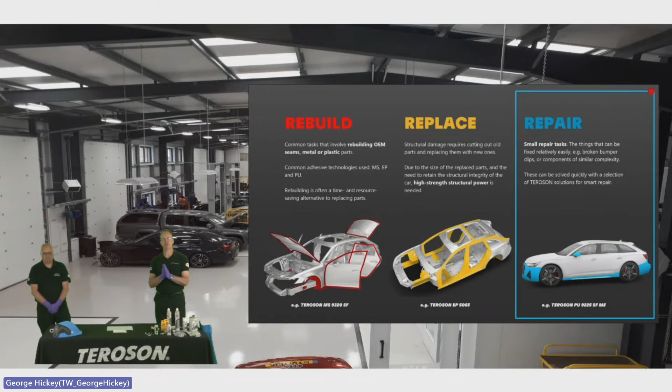And again, this room, this is a big change from last time. And again, it's work in progress. I don't know about you, Barry, but there's cameras everywhere. I can count about 6 cameras. There's lights. Like being in the studio. We've had hair and makeup this morning. I think we're all ready to go. Yeah. Little tip, Baz, there's a couple of TV presenters just about to part company. If we get this right, it could be our next gig. Yeah. Hold tight. So let's start.

This first slide represents where we are currently. We're going to be at the Automechanika in June, and we have a car shell that we had last year, but we've done some more effects with it this time round. A colleague of ours, Lee Goff, has actually painted the vehicle to represent these 3 colour stages: red, rebuild; yellow, replace; and blue, today's subject, is repair.

Yeah. Now, back in October, November, when Lee and I did the sprayable seam sealer, that came into the rebuild section with the modified silanes chemistry. And that proved to be successful. We got a hell of a lot of sales leads from that, which was great. And that's been a very good way forward. Hence, we're doing this one today.

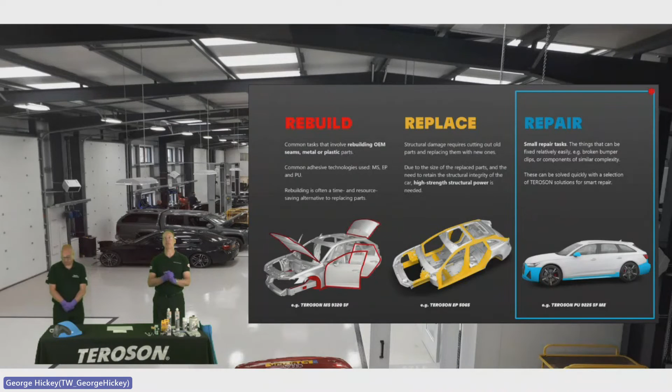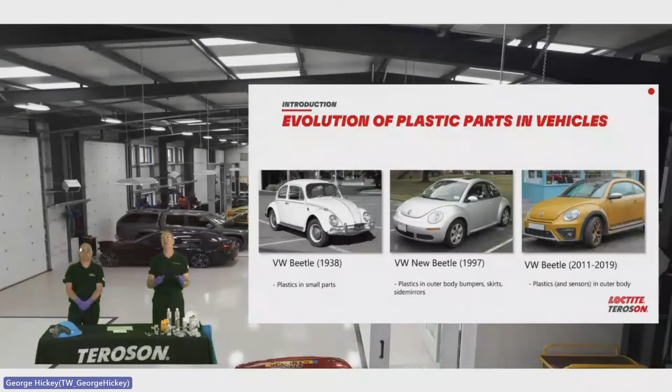And from a car manufacturing point of view, car manufacturers are obviously looking at reducing the weight of the vehicle the best they can, so that it's going to be a lot more economical to run, a lot cheaper to manufacture, and a lot better for the environment. Ideally, that's where we're heading. So that's the big changes in progress there. And this is where Henkel as a manufacturer plays a massive part in actually putting these cars back together after repair.

So again, these are a couple of photos I've taken on my travels. I'm not going to tell you where, but I think that generally represents most crash repair centres we visit. They've generally got a skip through them. I'm not doing a David Attenborough, not lecturing anybody, but from an Henkel point of view, we can certainly help reduce that pile of plastics. It's wasted opportunities. There's a lot of plastics there.

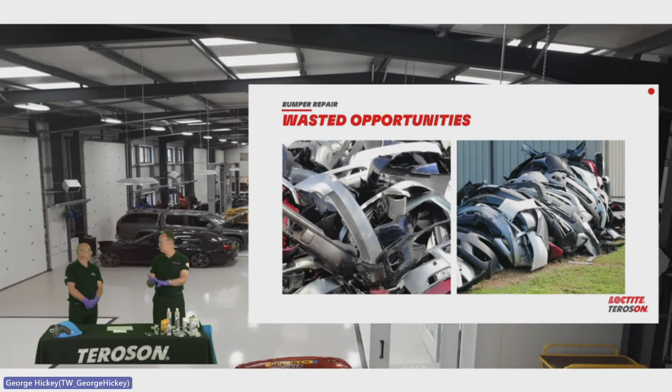I hope on this webinar today we've got a lot of estimators in the audience, because this is key. It's an estimator's dream. If we can get a lot of these bumpers repaired rather than replaced, it's bringing labour and opportunity back to the body shop.

So practical examples of where these repairs are on a particular vehicle. You see the car there, colour coded with the blue, showing exteriors and interiors. Exteriors: typical bumpers, spoilers, bonnets, tailgates, boot lids, roofs, doors, side panels, etc. Interiors: lugs and clips on coverings, on pillars, for example.

How many times do we go into a body shop and they're stripping carpets out of these things all the time, roof linings, and a panel beater painter might just break a clip off and they've got to replace that. Yes, they can order a part, but how hard is it to get these days. So it's a lot easier if there's a system in place to just repair rather than replace.

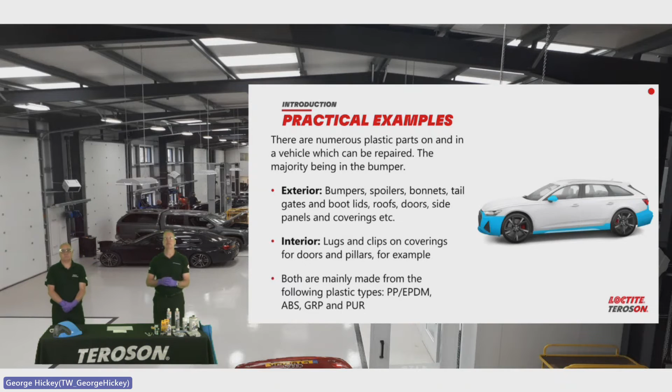Most of these plastics that we come across in manufactured cars are typical plastic types: PP, EPDM, ABS, GRP, and PUR polyurethanes. That's generally where we're at.

So why repair? My question back to you is, why not? You don't have to replace things if you can repair them. As you can see on the slide, it can in some instances be cheaper to repair a bumper than order a new one. It's more sustainable, better for the environment, and reduces your pile of bumpers outside the back of your body shop.

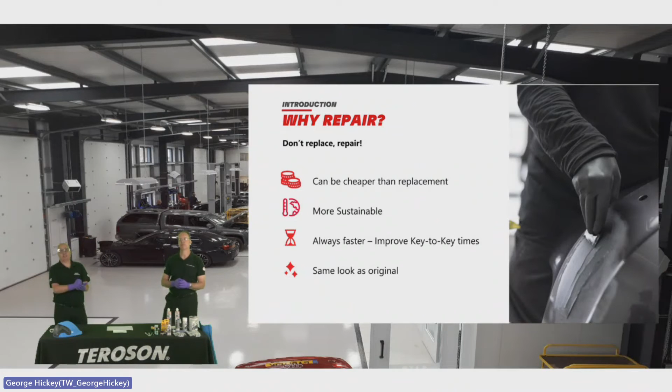It's definitely always faster, especially as we've already said - trying to get parts today is the biggest headache for a lot of body shops. How many parts managers are just banging their heads against the wall waiting for parts to arrive? If you can repair something, it's faster and it improves key-to-key times, meaning the car's not in your body shop as long.

Hence why courtesy cars - you mentioned the other day how many courtesy cars are out there. This reduces the time they're out there and gets them back to customers quicker. And you're using the original part, so it basically looks the same as the original.

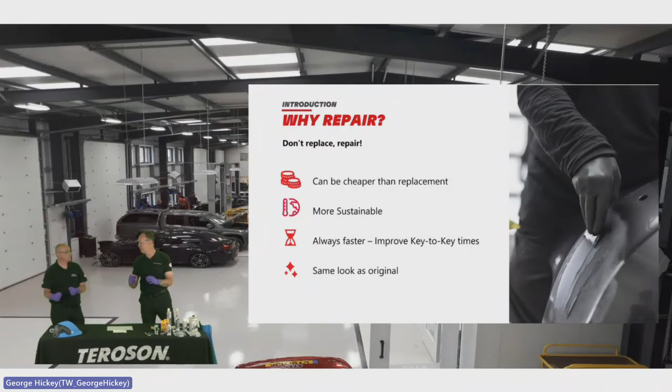Not only that, if it's not an OEM part, quite often a lot of the aftermarket parts aren't exactly a great fit. So body shops are ordering parts that don't necessarily fit like the original. Again, if we can keep the original and get a repair in place, it's a win for everyone.

So there are a couple of do's and don'ts. You can repair bumpers, lugs, spoilers, boot lids, as we said - and not just on cars, motorcycles too. You've got your fairings, your plastic fairings, everything like that. There's loads that can be repaired as well.

There are a couple of don't-do's. We don't recommend headlamp lenses and radiator grills to be repaired, and also brake fluid containers and fuel tanks are prohibited from being repaired. Pretty obvious, but it needs pointing out - it's general industry standard that you're not repairing those.

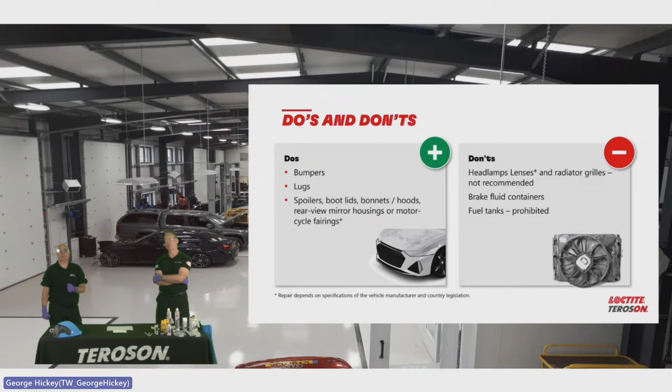So what's in the system? Our system is the Teroson PU 9225, our plastic repair adhesive system. We have a few different speed products in that range: the standard one, this 9225; the 9225 SF, which is the super fast; and the 9225 UF, which is ultra fast. We also have ME versions in the SF and the UF.

Whoa, we're complicating things now. What's ME? So where are we going now? ME is basically micro emissions, so there's less emissions from those products. It's better for the user, there's less isocyanates in products, and it's better for the environment. Safer for the environment. Yeah, so that's the adhesives.

We also have a cleaner, and we also have an adhesion promoter. And we've also got a fibre mesh, which we use to bridge gaps in the back of the bumper and reinforce it.

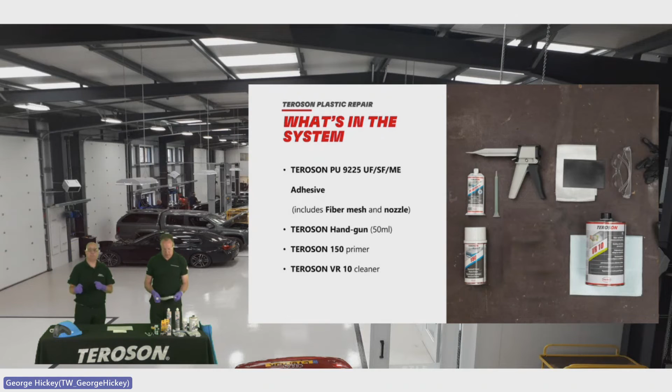Julian is showing you now. That'll be this, the mesh. Really strong, yeah. Again, what I love about this, we're not putting any metal back into the plastic. No, it's just this. No staples, no rivets, no screws. Just this.

Okay, so on the product range, we briefly mentioned them, we'll just briefly go through them. So we've got the 9225, that's our slowest of the products. That product basically gives you sort of 7 to 10 minute working time, and that will fill cracks bigger than splits in bumpers, bigger than 7 centimeters. And we're going to show some examples of different sizes and what we can repair with different products.

So then we've got the SF, which is a super fast version. Both the 9225 and the 9225 SF are available in 50ml cartridges and 250ml cartridges. The benefit of the 250ml cartridge is it just goes in a normal caulking gun. So again, it's just a two component product, like the panel adhesive.

Yeah, exactly. So your SF is for cracks and splits smaller than 7 centimeters. You've got a lot less working time, so you can sand that product within probably 10 to 15 minutes. But then, as we already mentioned, we've got the ME product again, the health and safety version.

And then we've got the UF, which is the ultra fast product. That product's too fast for doing splits and holes in bumpers. What's that product used for? That product is used for making clips. Say you break a clip on a bumper or on the back of a trim, that product is used there, and we can just show you a little example of what we've made up here.

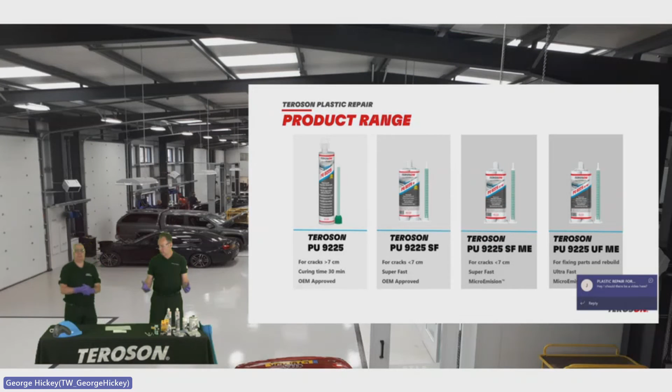We can just zoom in. So what we've done there is we've actually made a 90-degree bit. So if that was part of the bumper, you could then make the clip for that there. And also, if this was the edge of a lug, you can make the edge of the lug, then sand that to shape, and drill through it. And you're repairing, replacing the lug instead of replacing the bumper. You're making a new part, a bracket or whatever you can make.

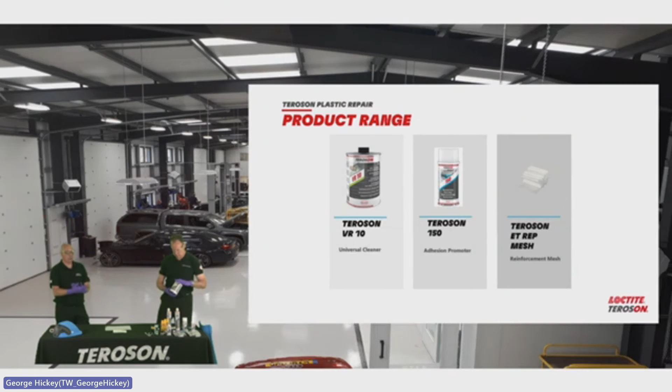So obviously we've got the adhesives, but you need, we've mentioned them already, but we'll just briefly go through the other products. So you've got the Teroson VR10 cleaner. This is our universal cleaner. So whether you are replacing glass in a vehicle, panel bonding, or even using our sealers to replicate the OEM beads, this is our cleaner, and obviously as well as plastic repair.

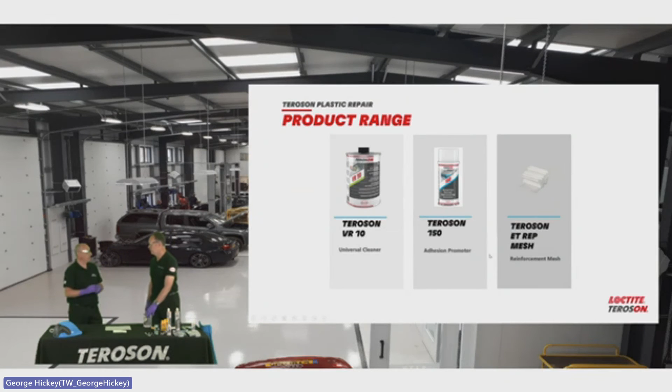It's also amazing for if you're struggling to get double-sided tape or moldings to stick. You can wipe it on, it flashes off in minutes and leaves you a totally clean surface to stick the products to. We appreciate everybody in the body shop uses panel wipe generally, but panel wipe has its place. But for surface preparation for our adhesives, this is always the go-to. Definitely. And this is a process that they need to work to, Barry. We don't want you missing a process out, we need you to use all the components, yeah?

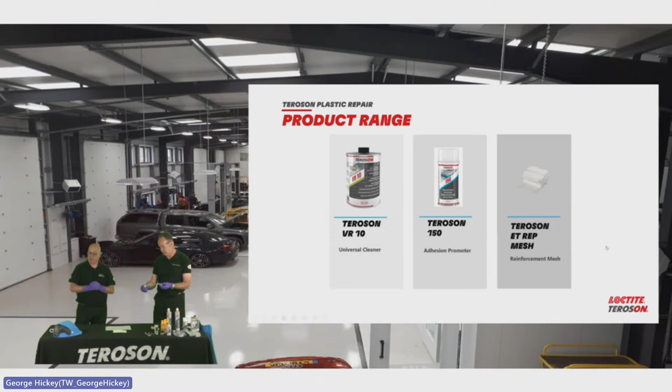So the magic dust, or fairy dust as we'll call it, is the Teroson 150 primer. So we've used, as Julian said, the process: the cleaner, adhesion promoter. That's what allows the 9225 product range to stick to all plastics. And we've also got the mesh that Julian already demonstrated. This comes in a meter length, so you just cut this accordingly to the size of your repair, and away you go.

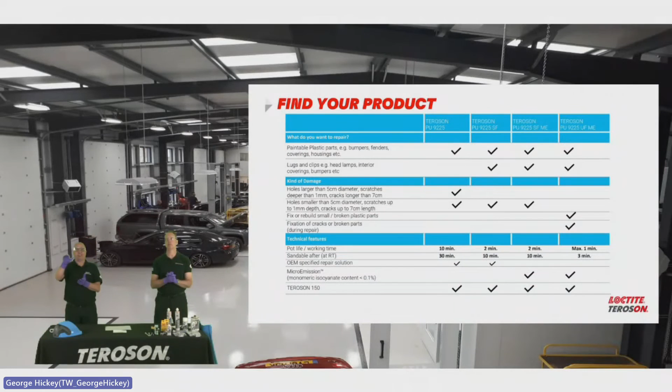But on this slide, there's a lot of detail. It's basically just taking you through each product, where it can be used, best applications, and it gives you the working time and the sandable time as well on that slide.

So advantages, just briefly going over what we've already mentioned, using the Teroson plastic repair system. There's many advantages. It's efficient, it's smart, it's easy to use. Anybody can use it, the apprentice can be doing these things. You don't have to be a highly trained technician to use it. It's OEM specified by many manufacturers.

It can be used for splits, holes, scratches, anything like that. We've got the range of products with different speeds so you can repair all these different sizes of damage. What I like about it, Barry, is it fits every workshop, every body shop.

Gone are the days, do you remember you used to have a plastic cup, fill it with water, slice a little bit of plastic off, drop it in the cup, see if it sinks or floats. That then determines what polyurethane you use to do the repair. This system fits all. So whatever you've got coming through your body shop, 99% of plastics, bumpers and trim can be repaired with this system.

That's it. And the big thing is we've got the health and safety products coming through, which is becoming more and more important. More of the micro emissions are coming along in the process, aren't they?

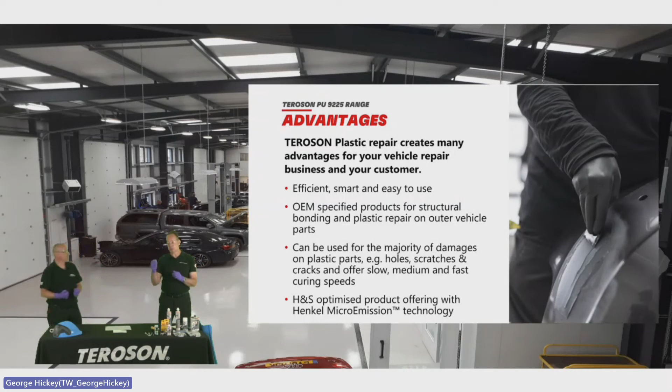Getting into the system a little bit more, surface preparation is the first stage, and that's key. As Julian said, use the system and you should not come unstuck, for want of a better word. You've got the primer application, you then repair the damage, and then you finish it off.

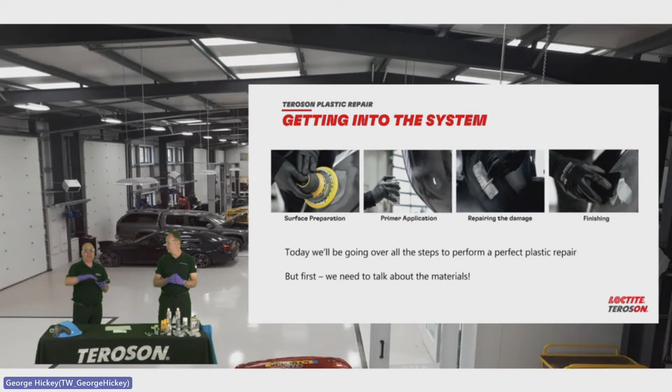So we have got some examples to show you. Excuse me, I'll just pick this up. So this is a bumper that we've done a demonstration on, and we've just taken it through the different stages so that you can see it, because seeing is obviously probably better than us trying to explain it.

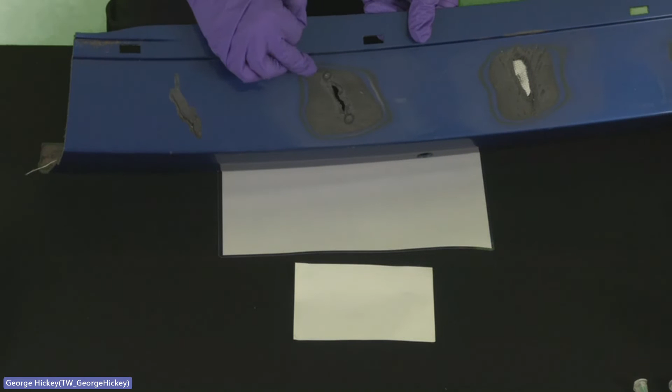So what we've got here, you've got the damage on the bumper. The first stage is on the split. We've marked there on the circles to show you. We would drill the end of the split, and what that does is it stops the split from spreading any further. We then, with a DA sander, DA that back.

Reference to that, Barry, what sort of abrasive do you want to be hitting this plastic with? Because we visit these body shops and a lot of guys are hitting this with like 80 grit, and they ruin the plastic before they start the repair. So where do you think we should be on abrasives? Well, maximum for soft plastic is 120 grit. Yeah, absolutely. And then finishing off, you go to your finer grit products and things like that.

So we've cleaned this, we'll then DA it back to the bare plastic, and don't be scared. As you can see on this bit there, you've got the damage. Don't be scared to open the damage up a bit, rather than, especially if it's a neat crack, don't be scared to open it up, open the split up, so that you get material going front to back.

And then what we've done is on the front there, we V-groove the front. What that does is it makes the edge like that, so it spreads the material out and gives you a neater finish. It's a bigger surface contact area as well, isn't it? Rather than having a sharp edge, you've got a better surface contact area for the adhesive to hold to.

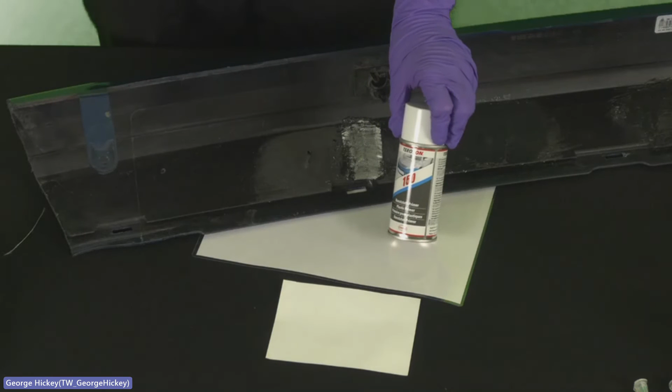We then come to the magic fairy dust, as Julian called it. So your Teroson 150 primer, you give both front and inside a light dust coating of that. Don't put too much on, it just takes a very long time to dry if you do, and it doesn't give you any benefit. You only need a dusting.

I think we need to explain at this point, we can't actually do a hands-on demonstration with sanders and grinders. We're not in a workshop environment here.

We're in a classroom environment, so we can't be having dust flying about here, there, and everywhere with all this equipment. But this is what we would do in a body shop. We would demonstrate it right through the process.

So your Teroson 150 primer, that'll take about 10-15 minutes to dry, and you're better leaving it to dry naturally rather than force drying it. You get a lot better adhesion, and again, you stick to the process.

On the inside first, we take our material, the adhesive, and pump it around the split there. We then take the mesh - we'll show you a little demonstration on this in a little while. You place the mesh over your adhesive, then take a spreader and push your mesh into the adhesive so it looks like that part we've already done there.

Then you cover over the rest of your mesh with the adhesive, and if space is critical, you can spread it out to make it go there. That's a point to note as well, Barry.

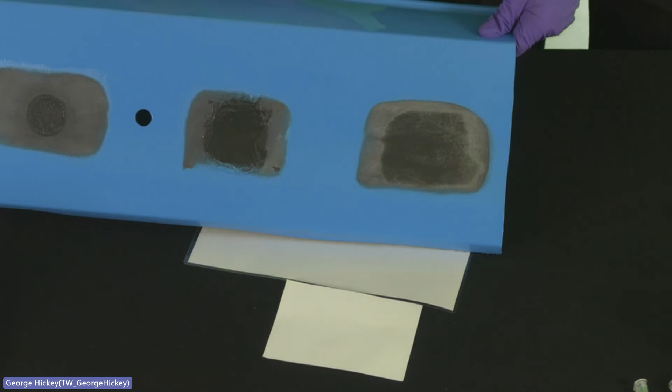Again, exactly the same process - we've got the matting at the back, and then moving that process along, exactly the same. You'd let that cure, or put an infrared lamp on it if you want to speed it up, and then again fill the front and abrade to finish. It's just making the right selection of adhesive depending on the size of the repair, and that's critical - otherwise you will get yourself in a mess.

So now what we're going to do, as we mentioned, is a little demonstration, so while we just get this bumper back up, we're going to show you how to put the cartridge into the gun, then put the nozzle on, and put the matting onto the back of the bumper. So I think we'll have 9225 SF for this one, Jules - that's your preferred choice. There you go, so we've got 9225 SF, and we put this into the cartridge gun.

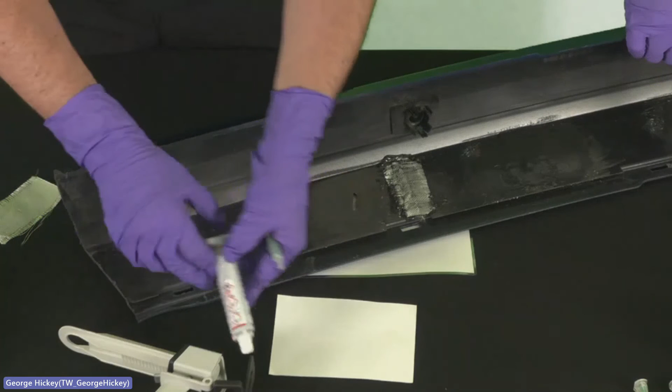We then take the end off. Hold on - before you put the nozzle on, with any 2-pack product, just pump a little bit out first. As you can see there, it comes out a little bit uneven - the black came out before the brown. So what you've done there is equalised the mixing ratio for the cartridge.

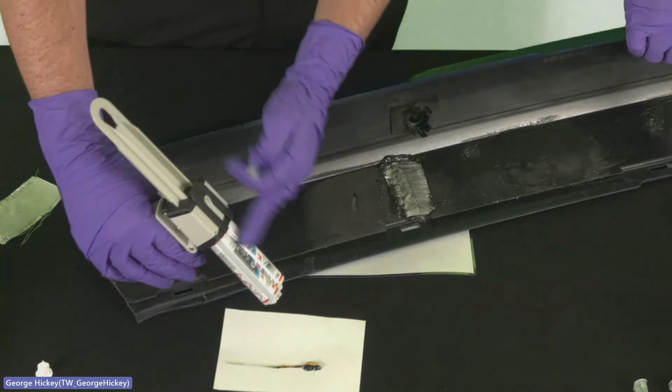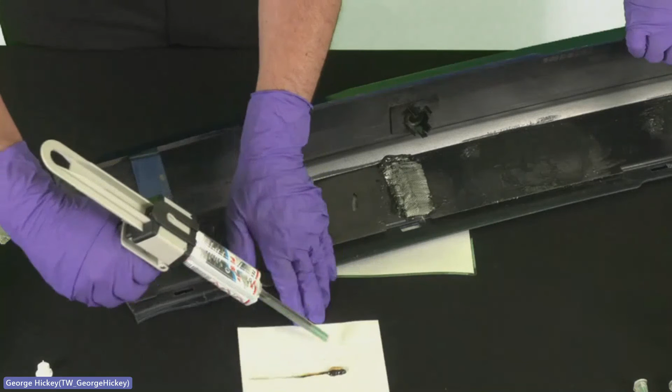We then put the nozzle on, and again, as with any 2-pack product, just pump it out and disregard the first bit. You can see you've got a uniform colour, so you know the mixing ratio is right. We've already cleaned and put the adhesion promoter on this, so as we said, we just pump the product all the way around.

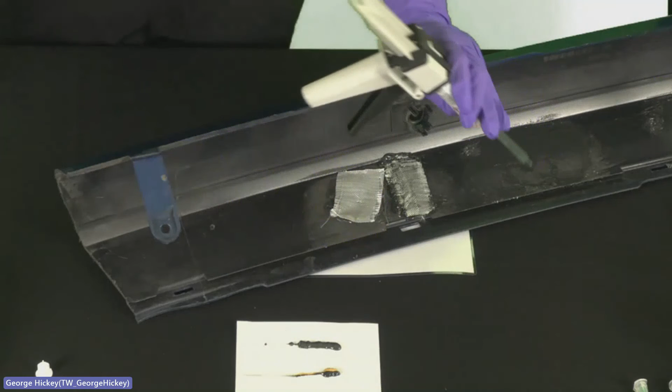Then get the mesh, place the mesh on top. We then, with a spreader, push that through, making sure that the mesh is impregnated with the adhesive. We then, with the adhesive again...

Remember, no metal goes back into this repair, nothing that's going to cause serious injury on impact. This is just a reinforcing mesh and plastic, so with adhesive.

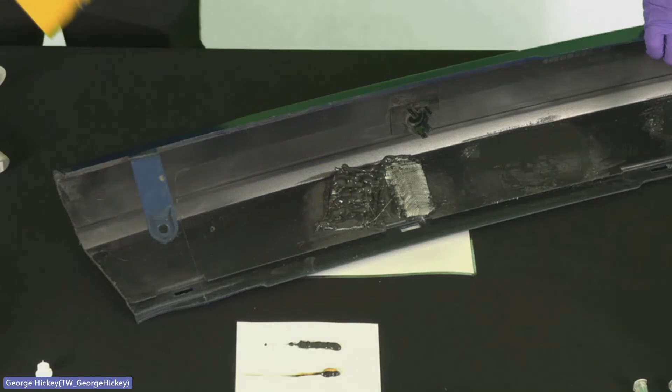With your spreader, you can then spread out your repair. People will see a bit of mesh there, but that's fine, great and simple. So then literally, that's the inside done.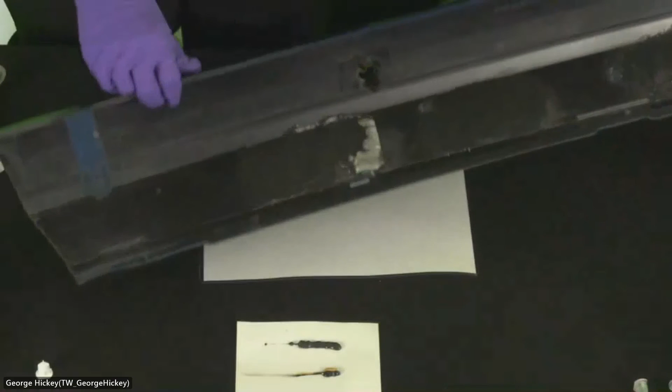And then you would go through your processes with the other stages. Just move that out of the way. Brilliant, Barry, great.

Do you just want to, whilst we're at it as well, again, it's not just bumpers, as we've talked about. This is an example of a wing mirror. Again, our colleague Lee Goff has painted this nicely. We've got a repair on here.

This is just the same. Again, like fairings, very thin plastics can be repaired like this. This is a great repair, very smooth, very easy to do. And again, it's just using the matting, just like Barry's shown you there.

It's got a thin slice of matting on the back, and again, very neat and easy to look at. And again, the application on this side is very smooth. You get a very good finish.

In fact, that's had no filler in it yet. It barely needs any, and it's ready to go. So that's just another example.

So that's all the adhesives, is it, Jim? That's all the polyurethanes. In relation to polyurethanes, but we've not finished there, Barry, because again, it's smart repair. We've got other bits and pieces that we want to talk about.

People may well have seen this, but we want to go over a couple of products. That is the Loctite 3090. So we've talked about polyurethanes here, different chemistry now. We're now going to 3090. This is a cyanoacrylate, okay, which in layman's terms is super glue.

I've even seen painters on bonnets where they've got 1 or 2 fish eyes in the paint. And rather than start again, they'll just literally plug this into the little holes, flat it off, and carry on.

Bet Lee's done that a few times. I'm sure he has. I'm looking at his paintwork now. I'm sure he has.

But yeah, brilliant. Very useful. Again, a multitude of sins this will cover. All sorts of things. Have I seen that on parking sensors or something? Well, absolutely. We do actually supply this through a manufacturer. I can't mention that manufacturer, but if there's anybody watching, they may well have seen this supplied in kit format. That's this adhesive with the Loctite SF770.

And that's the primer, isn't it? This is a primer. Now, the primer, all you're doing there, you're just changing the surface energy. Now, if you've got a plastic that's a little bit silky, a little bit too difficult to handle, then you use this bottle. And this comes with a little brush. You'll have seen this before, Barry.

I'm sure you've used this kind of thing when you're brushing your nails on a Saturday night. Only the weekends.

So again, typical example here. We've got a parking sensor bracket, and again, you would just brush this surface. And you can see how quick that flashes off. You'd leave that 5 minutes before bonding with the 3090. So how long does the 3090 take to grab? Initially, that's grabbed now. That's absolutely fine now. But if you're putting any stress on it, you want to leave that at least 5 to 10 minutes. But remember, full strength 24 hours.

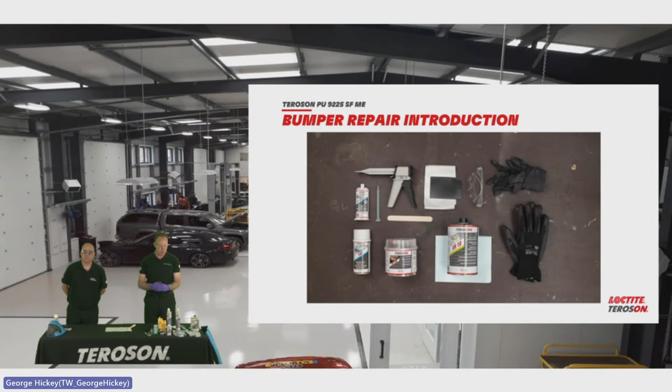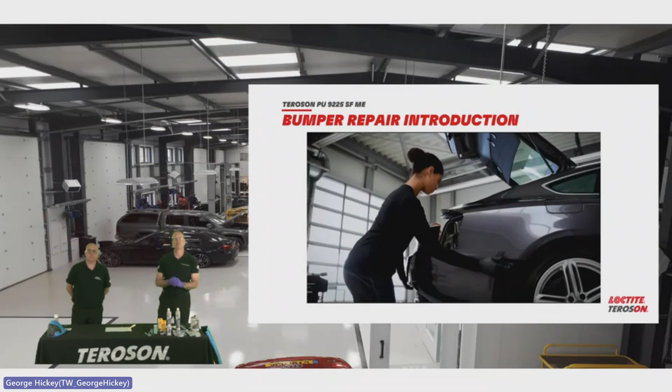So again, we're just going to play a video now. This is obviously more workshop orientated. You'll see the sanding in place, you'll see the belt sander, you'll see the tools that are required. Other than that, this is a repair. And I think I'm right in saying it's the SF 9225 being used? That's it. So that's why the colour looks slightly different. Yes.

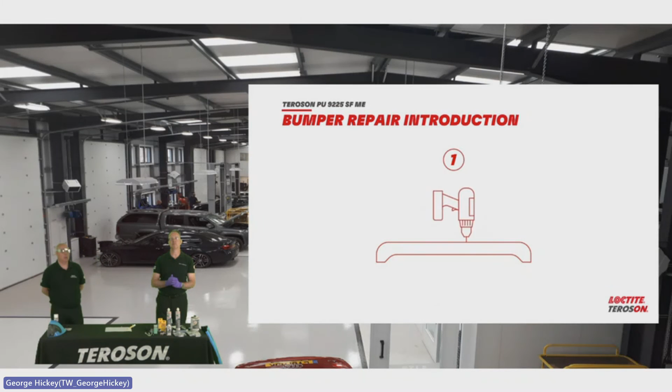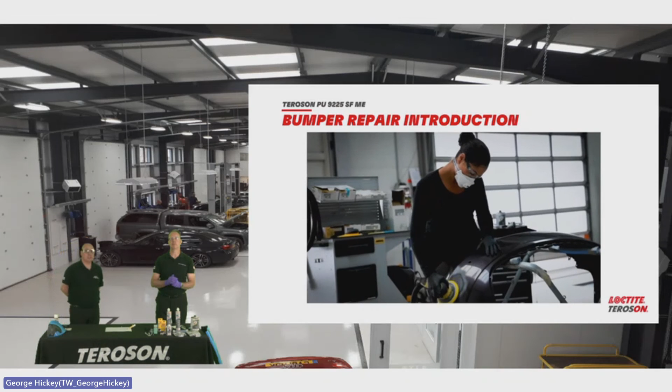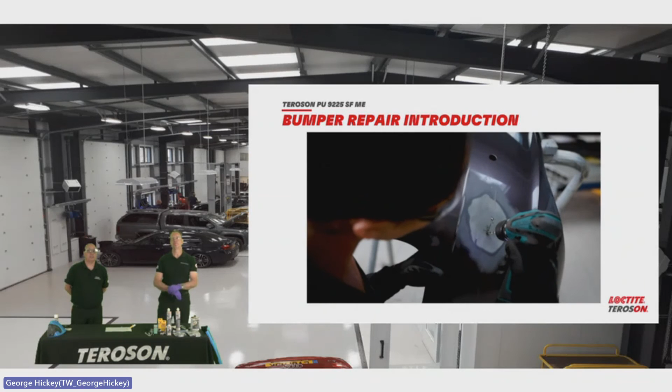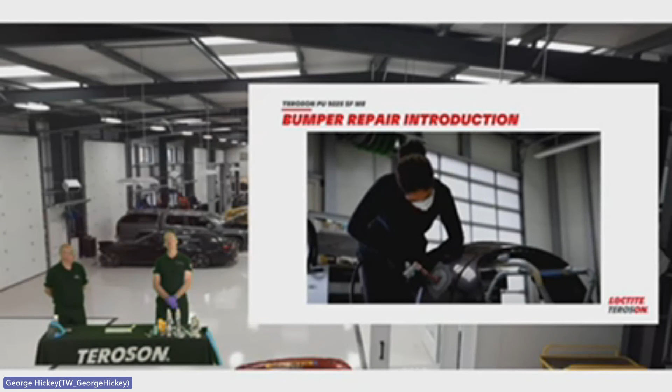So they've removed the old bumper, they're now going to go through the preparation stage. So she's already cleaned that, and now she's sanding it back to bare plastic. And as I said, drill the ends of the split, and that just stops it spreading any further. And there's your V groove going in and opening up the split, so that you can get material front to back.

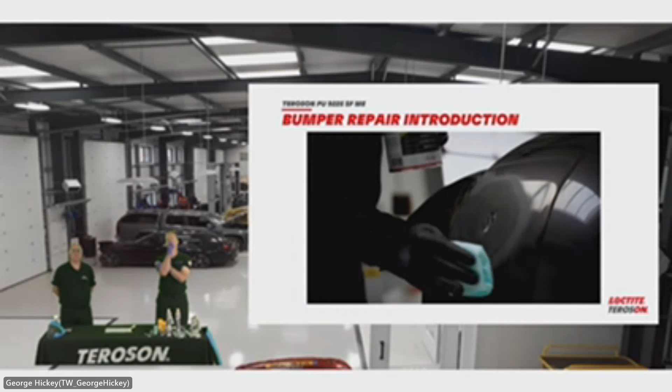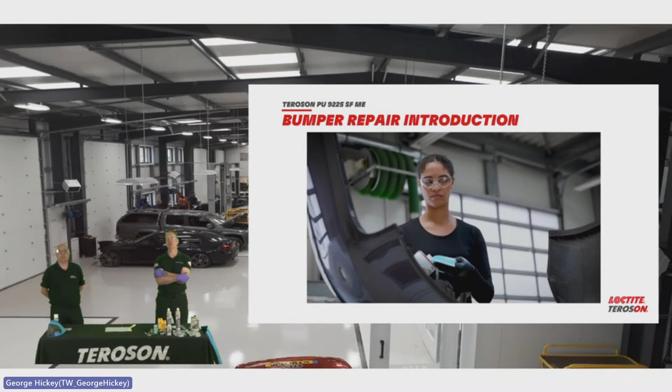Again, you don't want to be going at it too aggressively with a belt sander because you're just going to wreck that plastic. You can see she's just gently putting a V groove in there. Definitely. So she's just finishing it off, taking any of the loose plastic from her V groove, and then she's going to clean it with a VR10. And if you notice, she's only wiping in one direction. She's done that on the inside as well, and you can see how quick that flashes off as well.

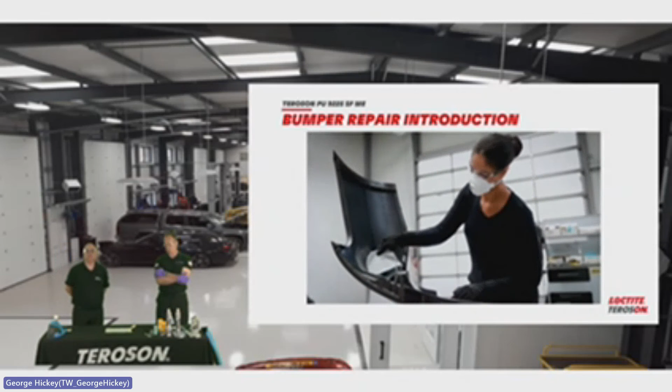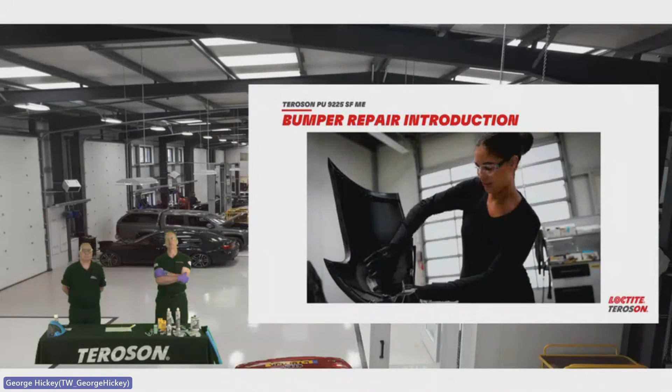And she's just going to give the inside a key. So again, now the mesh. She'll just trim the mesh to suit the size of the gap that she's filling. Offer it up like you did yourself, Barry, just to make sure it's a dry fit. Clean, fairly dust free.

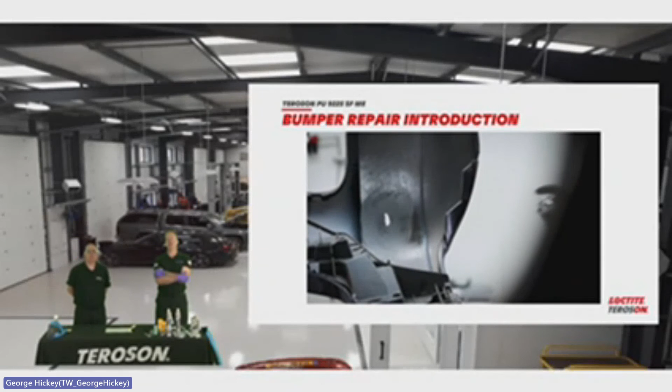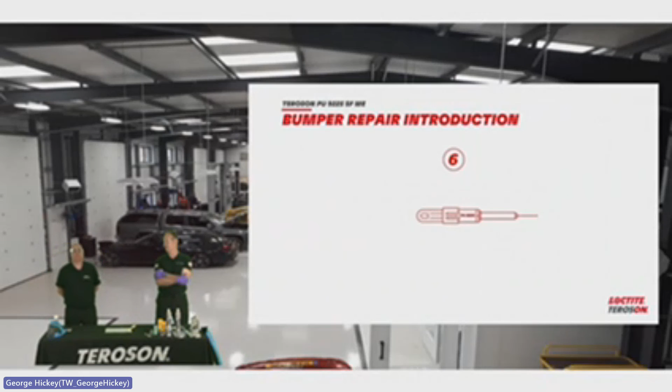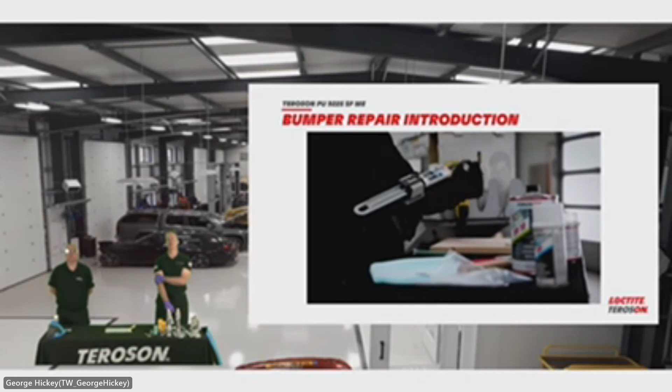That's it. The Teroson 150, as you can see, just atomising it onto the panel, nothing too heavy. Too much, you're just wasting and you're not getting any benefit. In fact, you just don't need to apply a heap of it, as in the little demonstration we did earlier. Positioning it like you did yourself, Barry.

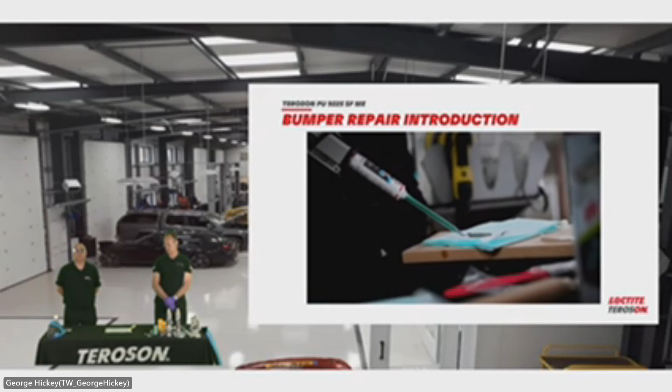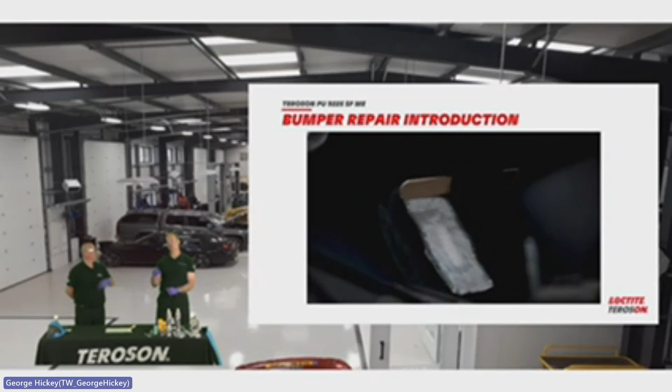Like you stated, Barry, she's keeping the nozzle in the adhesive as well. Quite critical. I think it may have been quite warm there when they were doing that, but again, less air bubbles. They've got the nice lolly sticks. True, rather than a spreader. Yeah, but either or, whatever works. Yeah. Covering over the back.

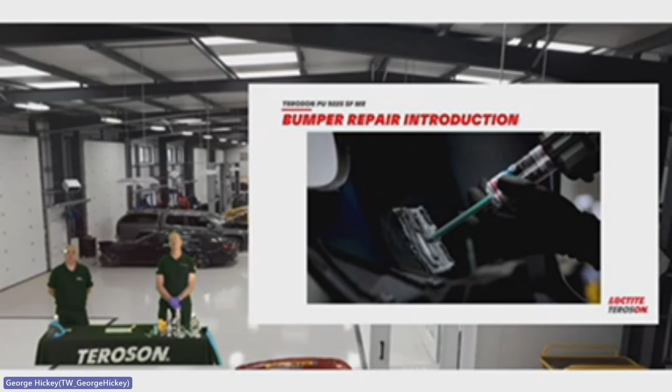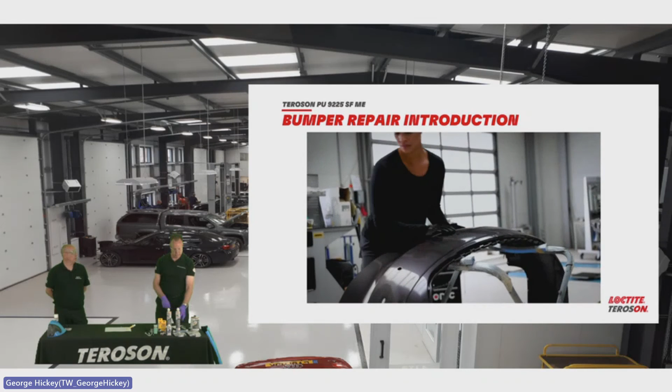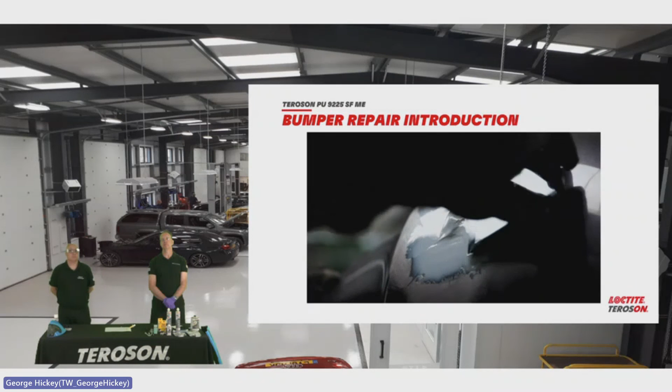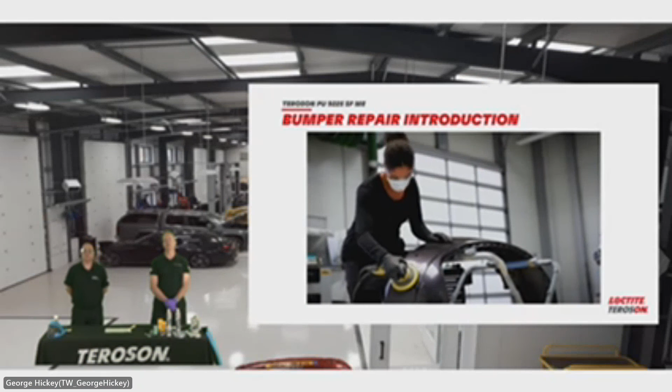Then spending a bit more time on the front. As you said, Joe, she's keeping the nozzle in the adhesive. Yeah. Spreading from the inside out. Leaving it high in the middle so that you can sand it down. Just operates like a body filler then, doesn't it? Yeah. Again, final sand ready for paint.

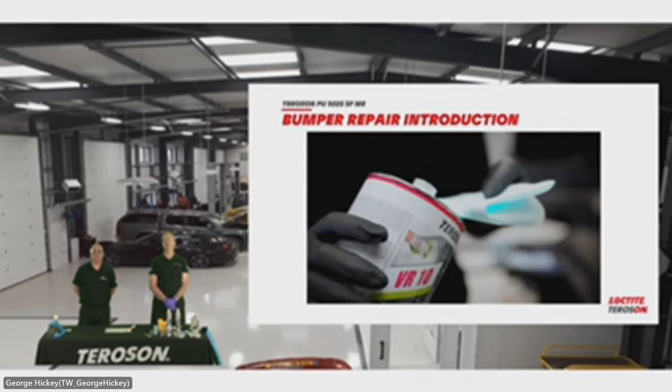Okay, prime and paint. Give it a clean. Make sure it's all right. And then if it does need a slight skim of stopper over the top, you can give it that. Would you use the plastic filler generally? Yeah, or a universal, something with a bit of flexibility in it. Yeah. Again, when that bumper's put back in position, there's going to be a lot of flexing, isn't there? Yeah. Getting it back in position, you've got to have something that's going to flex, as this adhesive does. Yes.

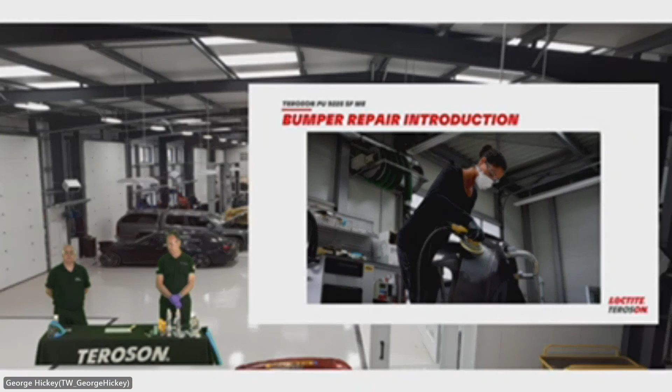So that's cured. Sander. I think even Lee would be happy with the finish, do you think? Not sure, he's hard to please, isn't he? That's true.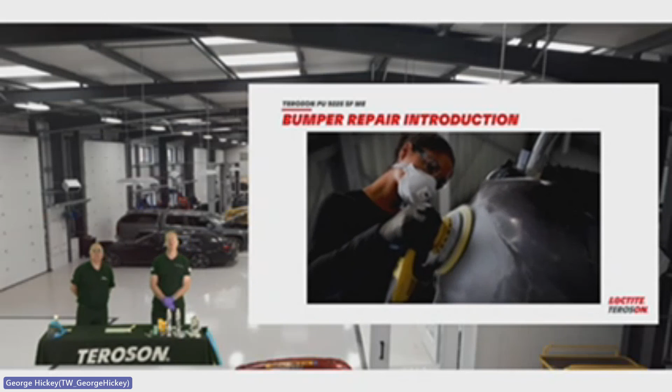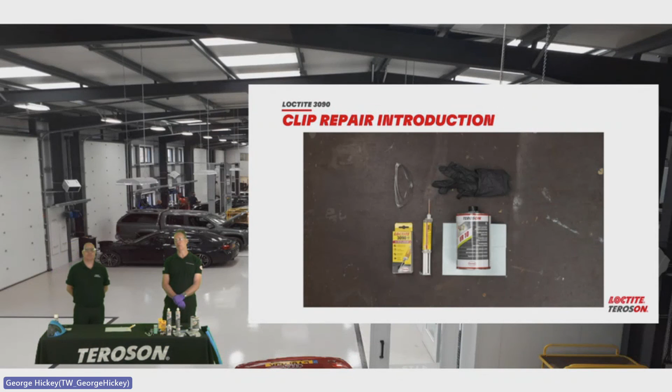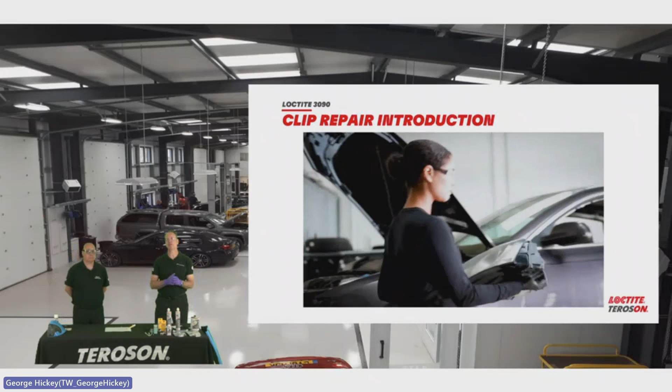So that was that. We're now going to show you the one with the 3090. Just doing a headlamp. And you will see, Barry, this is in conjunction with the 770 primer. Yes. So again, if the surface energy on that plastic is a little bit low, you go with the 770. You'll see that in use. Again, not always essential. But if it is that silky shiny plastic. And again, she's got a headlamp here.

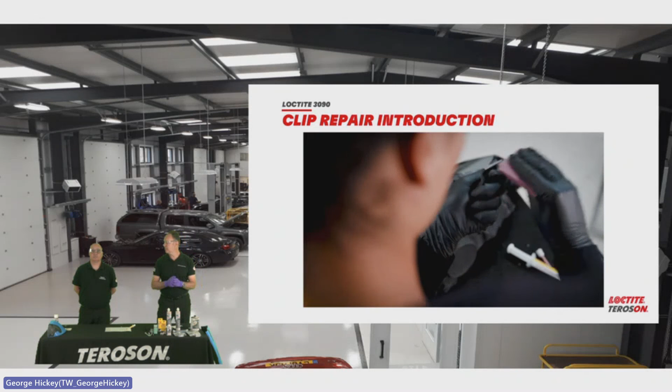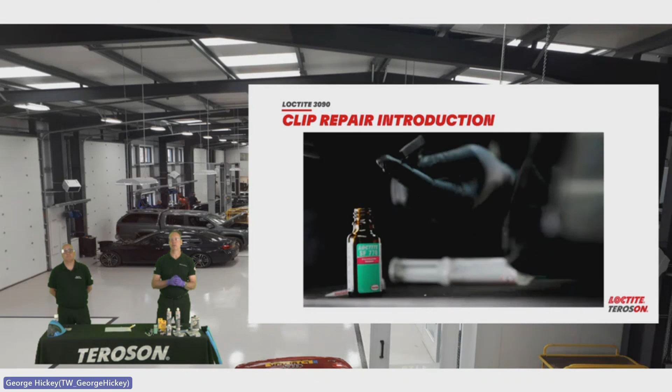Crikey, what do these things cost? A headlamp, 1,000, 1,500 pounds, if you can get them. So again, she's decided to repair this bracket rather than sit and wait, or send a courtesy car out for 10 days at the cost of the body shop. So again, just abrade that area, clean it, and then she will apply the 770 to that surface edge. To both surfaces. That's right. So again, just changing that surface energy.

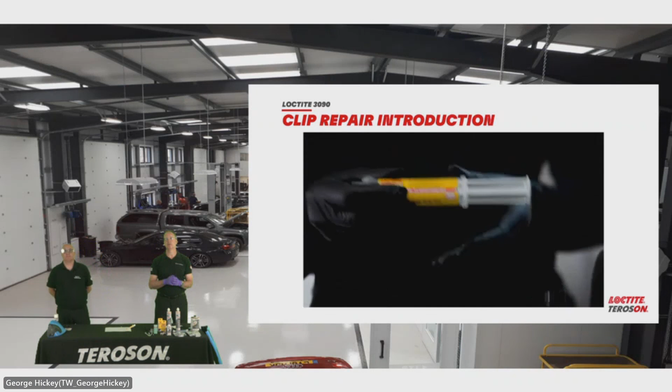Well, here it is, Barry. Now, fingers crossed, but I'm more than confident. Have a go with that. And it's been sat there. I don't want the audience thinking I've done a quick swap over. That's sat there 5 minutes, give it your best. I've had my porridge, mind. Give it your best. And it's only going to get stronger, as I said. Throughout this 24 hours, that will only give it strength.

And now, just one last thing. What are you doing with that? Well, this is always the crunch test. So the plastic repair that you've done there, Barry, we've got an old piece of bumper here. You can see we've got the repair, the reverse side has got the matting in it. And the front side, it's just been prepared, it's not been sanded back. But what I'm trying to demonstrate is how strong this is. Glad we put our PPE on. Are you worried about it? I'm going to start. Stand back.